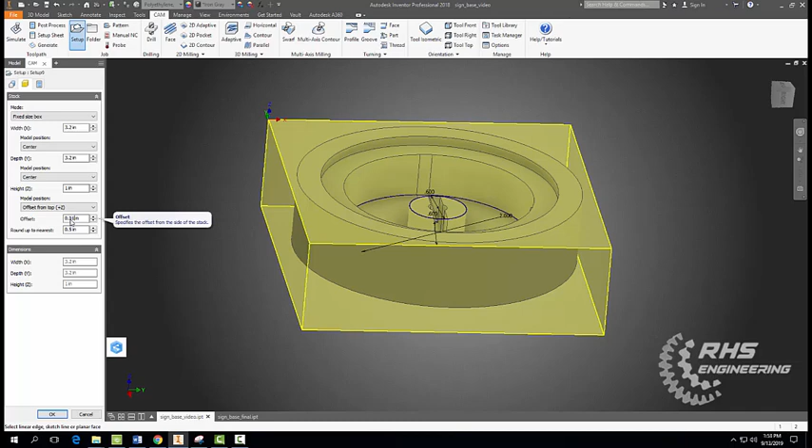Okay, now let's come on up here to our stock, and we're going to go to a fixed size box, and we want that to be 3.2 inches. Okay, centered by 3.2 inches. And our height is Z, and we're going to offset it from our top by 0.01 inches. Okay, and that should do it. Go ahead and hit OK.

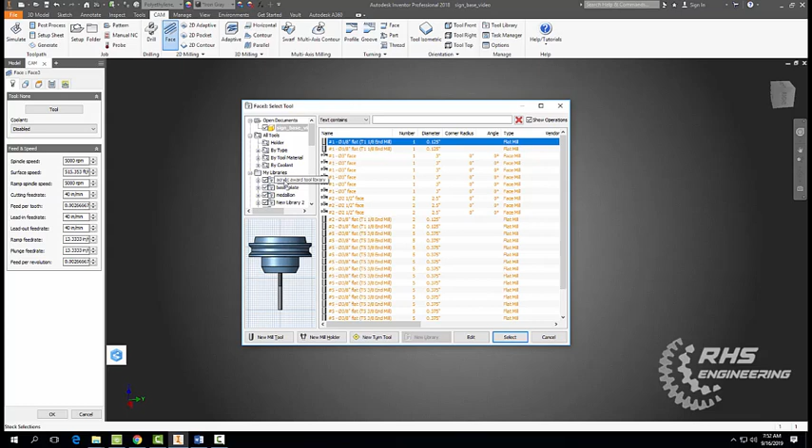With our setup done, we can start our first operation. So most machining operations always begin with a face. So we're going to come on over here and select face. Okay, make sure your coolant is disabled. And for our tool, you should have installed your acrylic award tool library. So click on that, and we're going to select the 3-inch facing mill. Go ahead and hit select.

We're going to go with a spindle speed of 5,000. All right, and a feed rate of 40. All the other default values are fine. For our geometry tab, we're just going to click the circle, okay? And then for our heights tab, the default values are fine here. For passes tab, we're going to use a stock offset and a pass extension. We're going to change these values here.

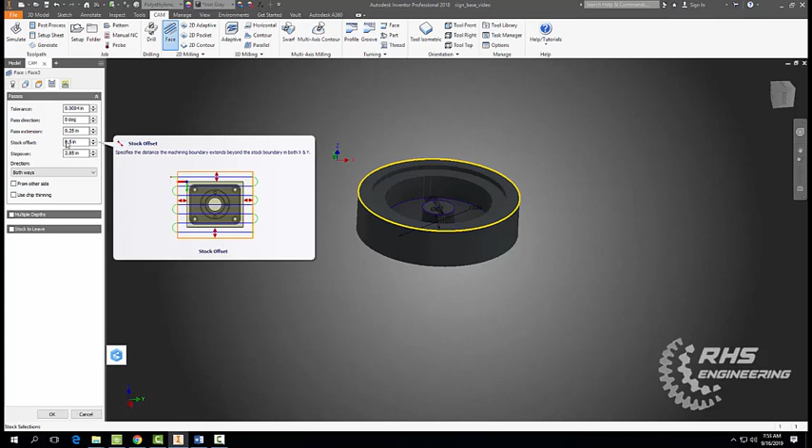So our pass extension is going to be 0.25. Okay, and what that will do is it'll move our tool a little bit out farther past our stock material when it goes to machine it. And we're going to use a stock offset of 0.5 inches. Okay, so that'll make sure our block of stock material is completely faced off. All right, and that should do it. Let's go ahead and hit OK.

By changing our pass extension to 0.25, notice our tool path goes farther past our part here. So it's covering a little bit more area here. All right, so for our next operation, we're going to do a 2D adaptive. So up here at the top, select 2D adaptive.

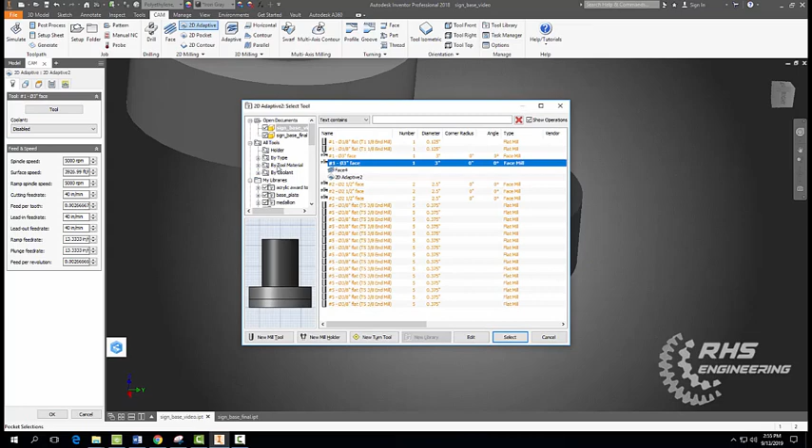Okay, we need to change our tool, but first let's go ahead and disable our coolant. Our tool, using our acrylic award tool library, is going to be a 3/8 flat end mill. And let's go ahead and select that. Our spindle speed, 5,000. Our cutting feed rate is going to be 60. All right. And we're going to do our ramp as 30 and our plunge as 30.

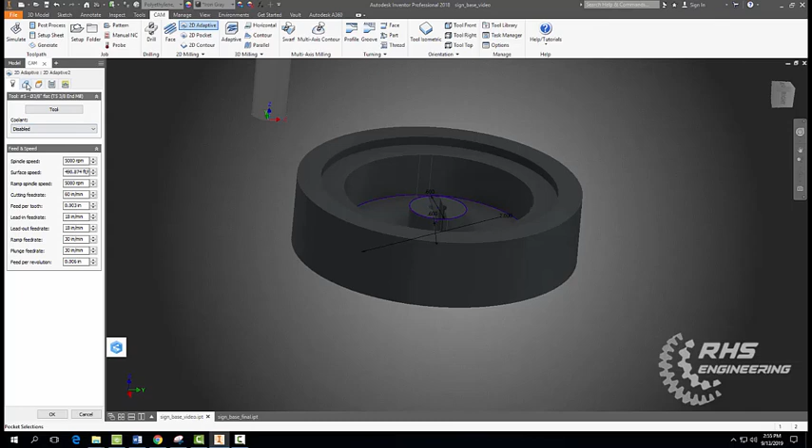Okay, now let's come on over here to our geometry. We're going to just select the outer edge of our part here. For heights, the default values are fine. For passes, we're going to use an optimal load of 0.2, so a little bit bigger step over.

And for stock to leave, we're going to leave a little bit of stock along the walls since this is a roughing strategy. We're going to leave 0.01 along the walls and none for axial. So we're going to basically go completely down to the bottom edge of our part here. We're going to leave no stock along the floor or flat areas.

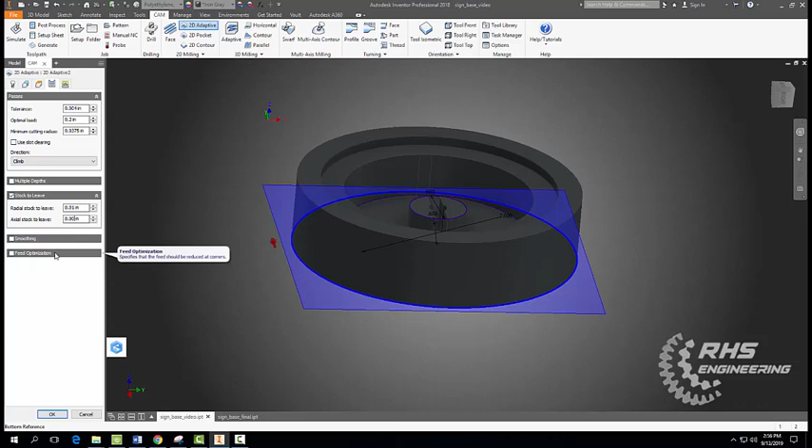Okay, and one thing we're going to do is we're going to check smoothing this time. And what smoothing will do is it'll take basically a bunch of linear tool paths and convert them into circular or arc tool paths. So it'll simplify your G-code. All right, let's go ahead and hit OK. And we have basically our tool path removing the material around our circular part here.

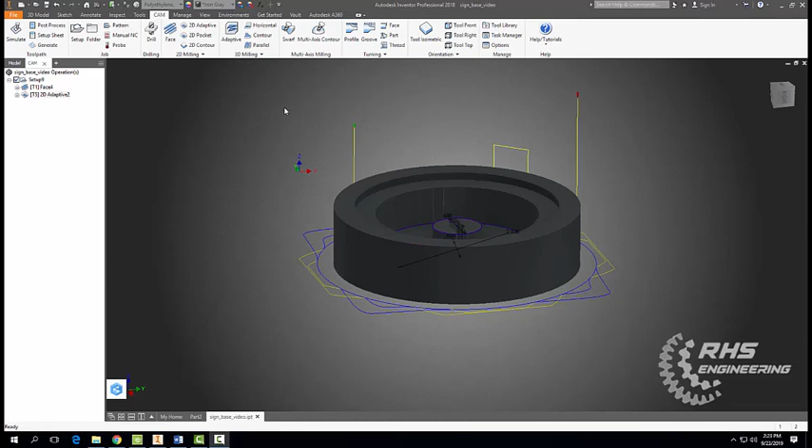Now that the material around our part is removed, we want to go ahead now and do an operation that's going to remove the material inside of our part. So we're going to start with a pocket here, but we're going to do what's called a 3D pocket. So up here at the top, go ahead and select 3D pocket.

All right, we're going to use the same tool as last time, our 3/8 end mill. Make sure your coolant is disabled. In case I forgot to mention that, it should be disabled throughout the entire setup here. So coolant should be disabled in every operation. Our spindle speed, we want 5,000. Okay, our feed rate, 60. And our ramp feed rate, we want 30, and our plunge feed rate of 30.

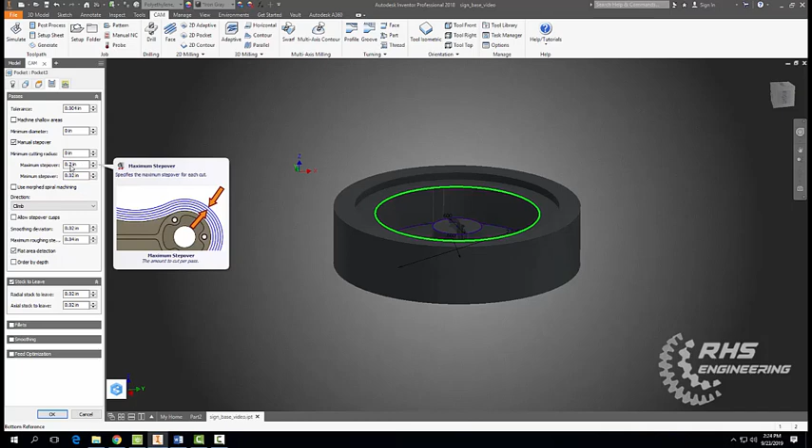All right, and up here at our geometry tab, we're going to select this inner circle right here, and that should do it. For our heights tab, all of our default values are fine. Okay, for our passes tab, now we got to make some changes here. So we're going to do a manual step over of 0.2. All right, and we're going to do, let's see here.

Maximum roughing step down of 0.4, okay, not 0.04. So every step we go lower and lower into our part, it's going to be 0.4 inches. Now for stock to leave, we're going to leave 0.01 along the walls, and we're going to leave 0 along the flat portions of our part here. So no stock on the bottom. And we're going to check smoothing.

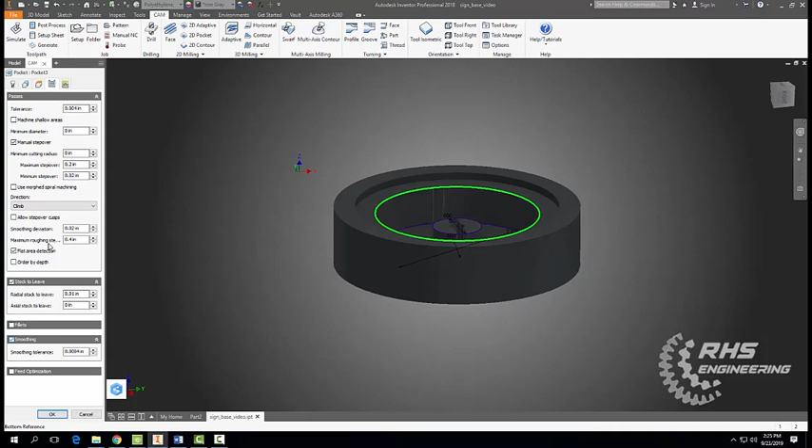And then over here in linking, the only thing we're going to do is go with a more aggressive ramping angle at 5 degrees. So make sure it says helix, and we're going with 5 degrees. Everything else should be okay. Let's hit okay. And that should do it.

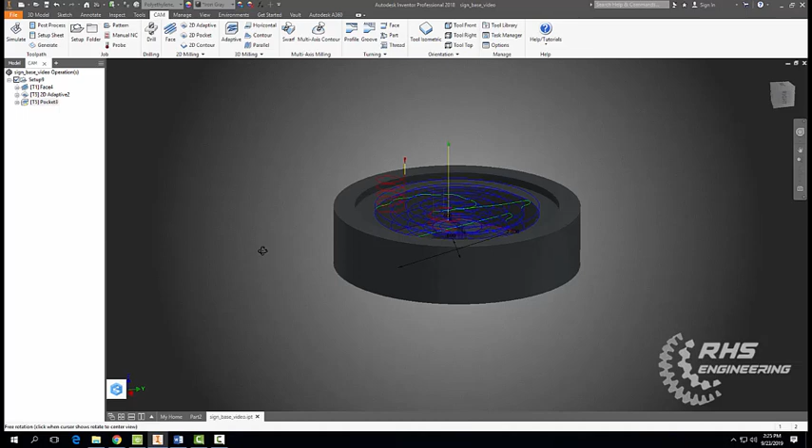So you're probably thinking, but Mr. Fuller, what about this area over here? Well, remember this blue line represents the center of our tool. So our tool is going to sweep around here. It's going to leave some stock, but that's okay. When we do our finishing pass, we will clean up this wall later. All right, so that about does it for our roughing operations. Now we need to start our finishing passes here.

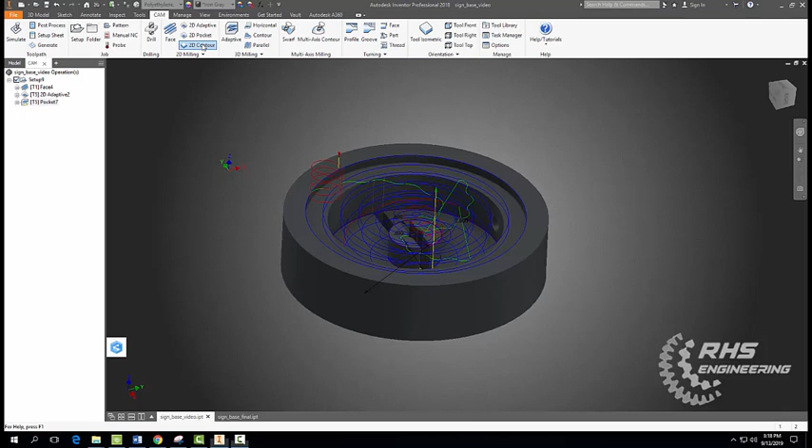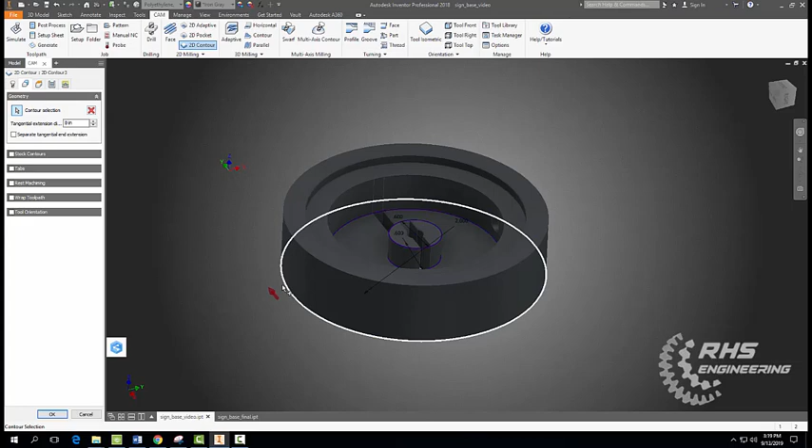So we're going to come up here to 2D contour. Once again, we're going to use a 3/8 flat end mill. Our coolant is disabled, but with finishing passes, we want to slow down our spindle speed. So we're going to go with 3,000 and a feed rate of 20. For our geometry, we're going to select this outer edge here because remember we left some stock behind. But we're going to do something a little bit different here.

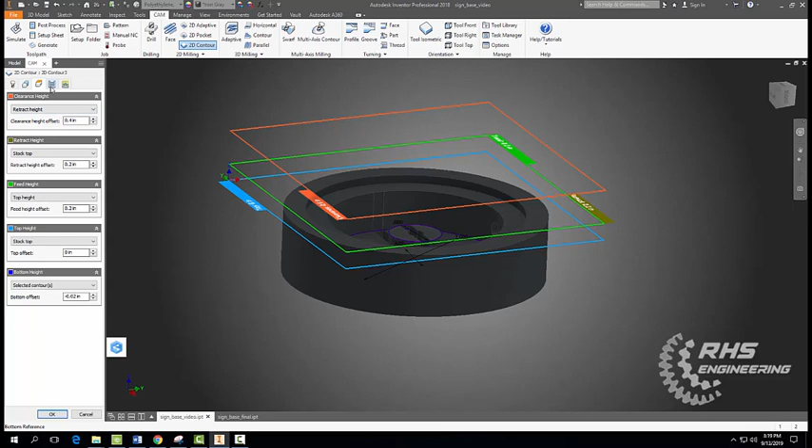For our bottom height, we're going to change this to minus 0.02. What that will do is bring our tool down, so when we're cutting around this guy, it'll cut a little bit deeper. So for our next setup, when we go to face this other side, it'll make sure that we have no material left behind. So make sure you set the bottom height to minus 0.02. Make sure your finish feed rate says 20. We'll check stock to leave and we'll hit OK.

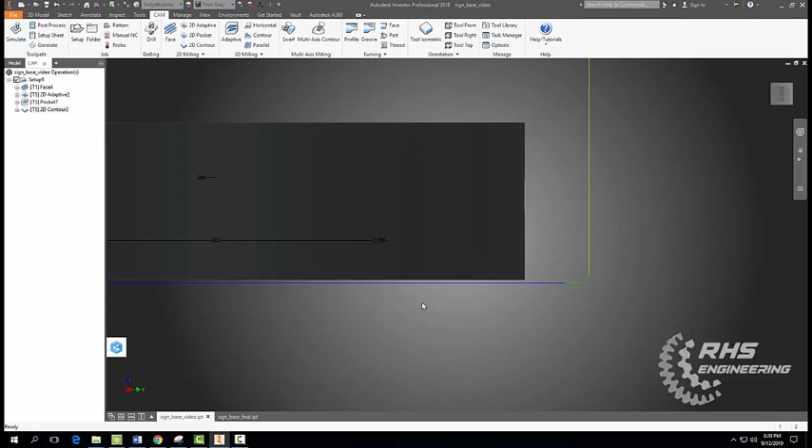And if you look, you can see our tool is going to cut a little bit deeper than the actual part. Like I said, that's to ensure when we go to face this side off on our second setup, all that material is getting removed. Okay, so let's go ahead and do another 2D contour. Same tools and feed rates. 3/8 tool, coolant is disabled, 3,000 and 20 for our feed rate.

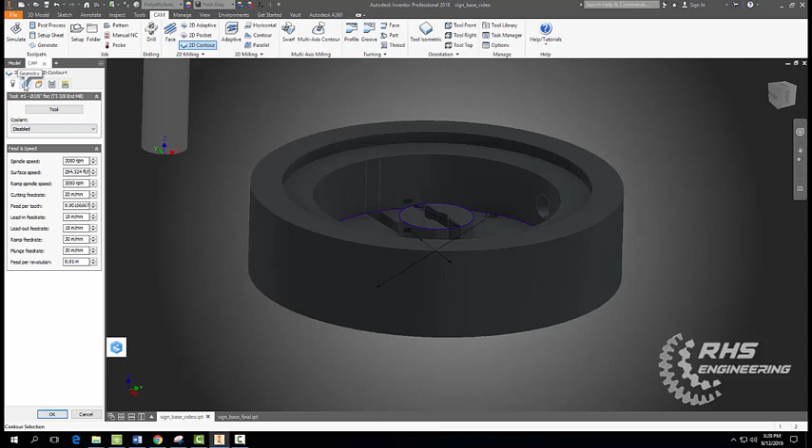So everything's the same. For our geometry now, we've got to remove the material along our vertical walls. So we're going to click there, and there, and there. Now this is important. You'll notice this arrow's inside here. You've got to click on the arrow because if you don't, your tool's going to plow through this plastic portion right here. By clicking on that arrow, now it's going to go around it.

For our heights tab, everything looks good. For our passes tab, everything looks good. Make sure your finish feed rate says 20. We will check smoothing, and we'll go ahead and hit OK.

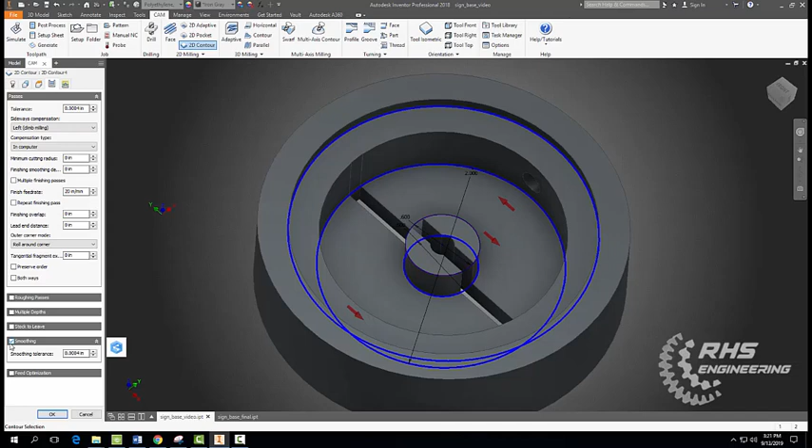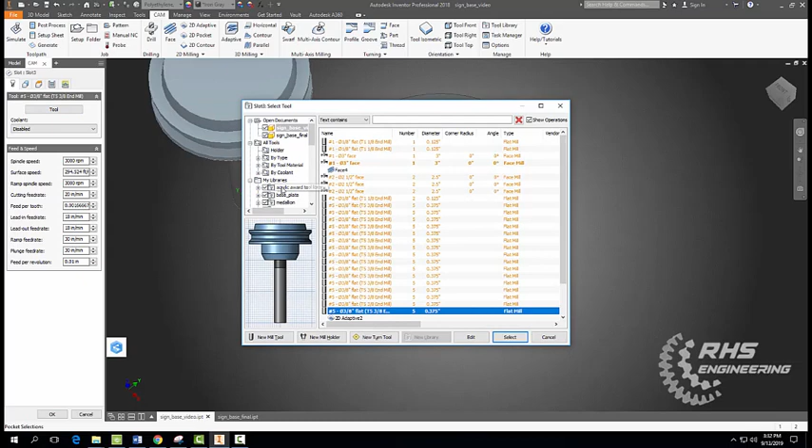With most of our material removed, now we can start machining out this slot for our sign to be placed into. So we're going to come up here to 2D milling, select slot. We're going to change our tool; now we're going to use a 1/8 flat end mill, so a little smaller tool. Coolant is disabled. We're going to go with a spindle speed of 5,000, a cutting feed rate of 30, a ramp feed rate of 30 and a plunge feed rate of 30.

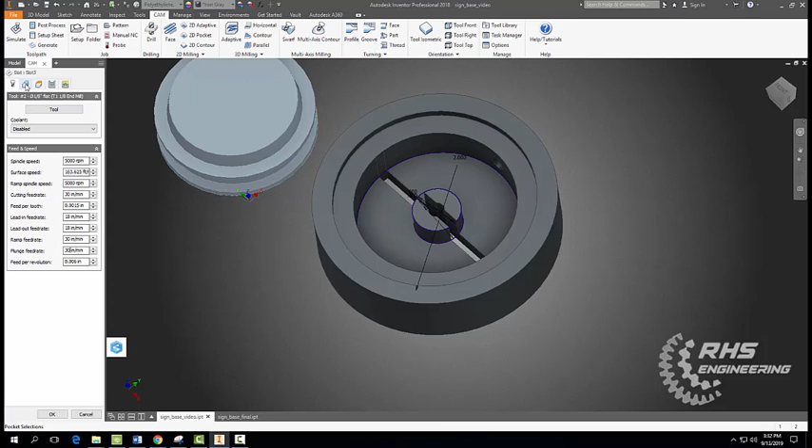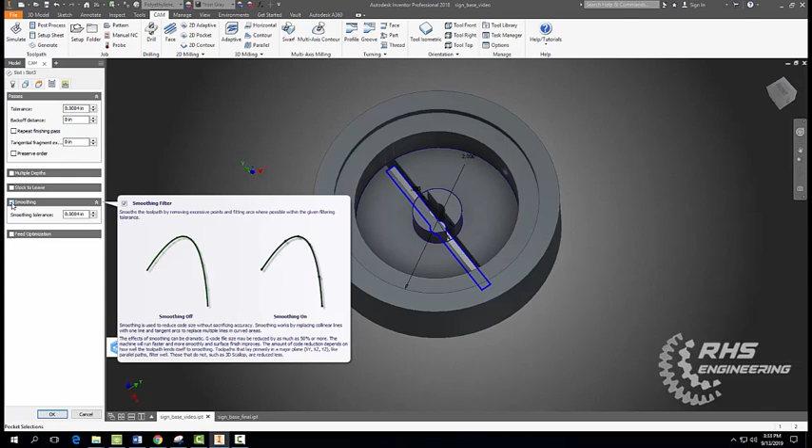Now for our geometry, we've got to select basically the bottom of the slot. And then for our heights tab, once again, we're going to send our tool a little bit deeper than the part, so minus 0.02 inches, not much, but just a little bit. For our passes tab, we're going to check smoothing. And for our linking tab, we're going to use a 3-degree ramping angle. Let's go ahead and hit OK.

And here is our slot. If you look at the toolpath here, you'll notice it only did a half circle, so we've got to do one more toolpath, and that brings us to a 2D milling operation called a bore.

We're going to use the same tool, spindle speed of 5,000. However, since most of the material's already removed, we'll give it a slightly faster feed rate of 40. Change all ramp and plunge feed rates to 40 here too, since we're going down pretty quickly.

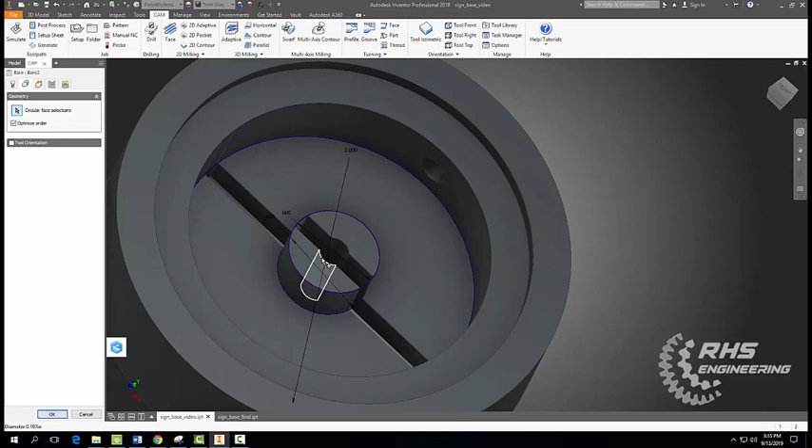For the geometry, we just need to select one of these faces. Notice it created this little boring toolpath down the middle. For our heights, same thing, we're going to go minus 0.02, so we'll bore down just a little past the bottom of our part.

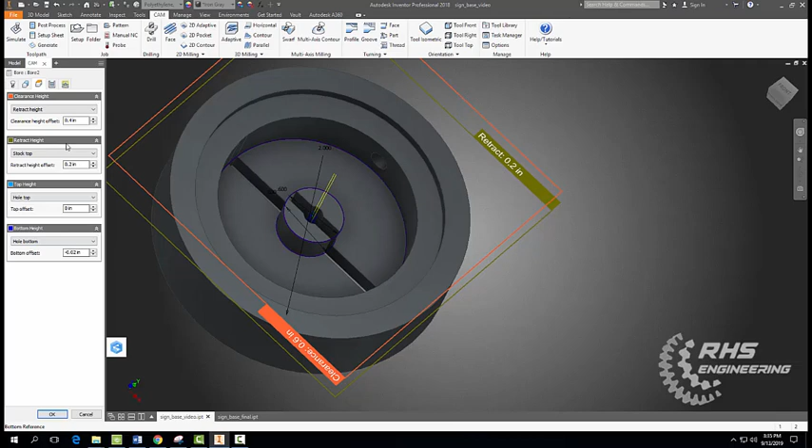Everything else looks good. Let's go ahead and hit OK.

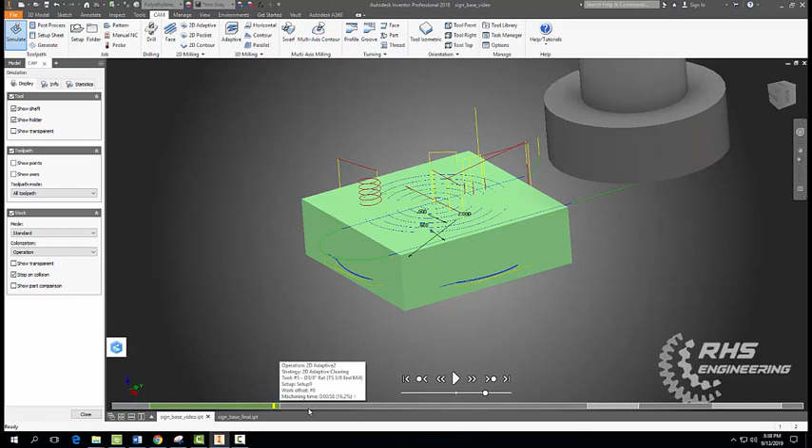Now let's go ahead and simulate it. Click on Setup, Simulate. First thing you want to check is that you hopefully have a total machining time of around 6 minutes. Check on stock, and also check on stop on collision. Hopefully you have no red lines down here, and if you do, let me know. Let's go ahead and play it.

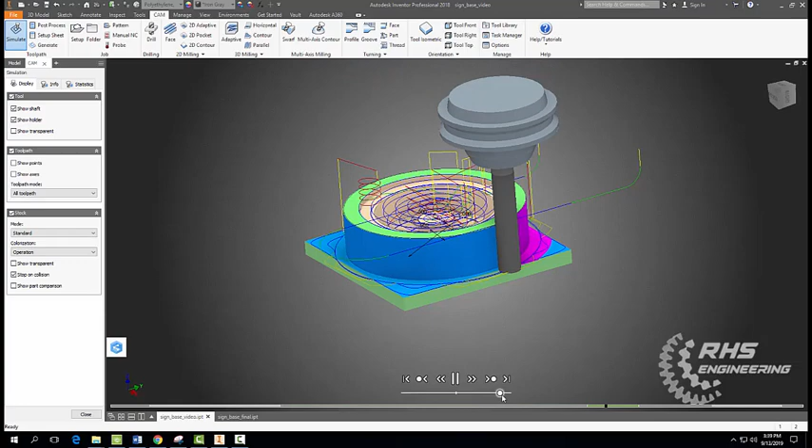We're going to do our facing, then come around and do our 2D adaptive, then start our 2D pocket, then our 2D contour finishing pass, then our slot, then our bore, and we're done. Looks good.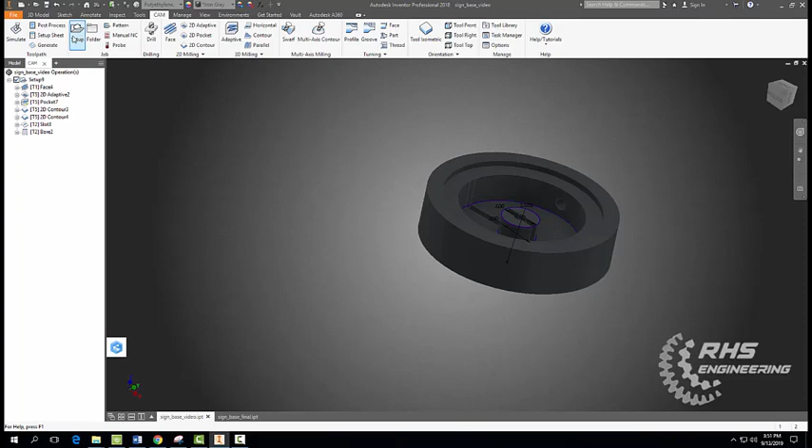Our first setup's done. Let's go ahead and start our second setup to remove the remaining material on top of our part. So we're going to start another setup, but we need to flip our part over, and we're just going to select this back corner.

Notice our X and Y aren't correct, so we're going to come over here to, let's see, let's go ahead and do a Y and Z.

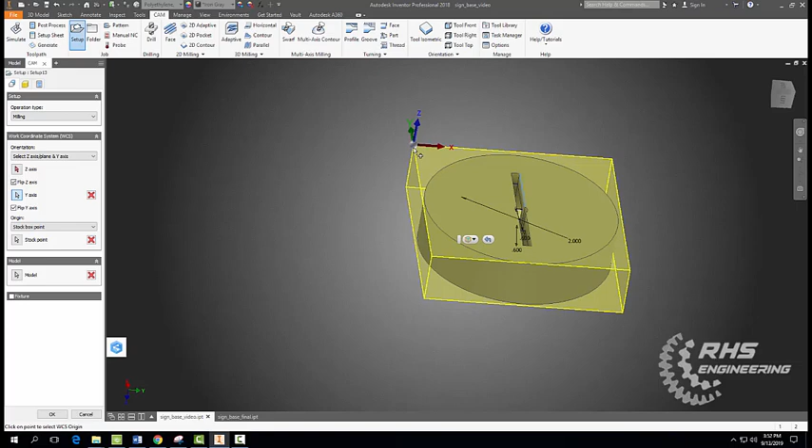I'm going to select my Y here as that, and then flip my Y, and then flip my Z. And I'm good. My positive X is going to my right, my positive Y is going away from me, and positive Z is pointing up. So that's what we want.

Now for our stock, we're going to do the same thing as before, but something slightly different. We're going with 3.2 again, centered, and 3.2 for our Y, centered. But remember, we removed a little bit of material, 0.01 inches with our facing operation, so our thickness is not quite an inch, it's 0.99 inches.

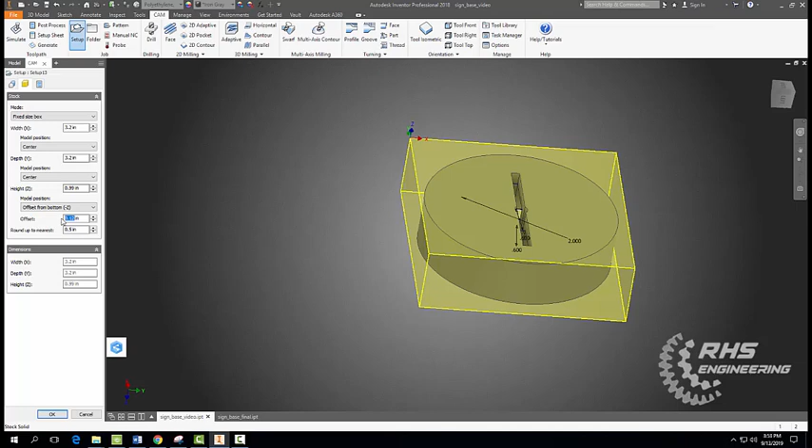For model position, offset from Z, we're just going to go 0. That puts it perfectly at the bottom here. Let's go ahead and hit OK.

The only thing left to do is remove the rest of the material on top of our part, and we can do that with a facing operation. Let's go up and select face. We're going to change our tool, come to our acrylic award tool library, select our 3-inch face, hit select, make sure our coolant is disabled. A spindle speed of 5,000 is what we want, and a cutting feed rate of 40 sounds good.

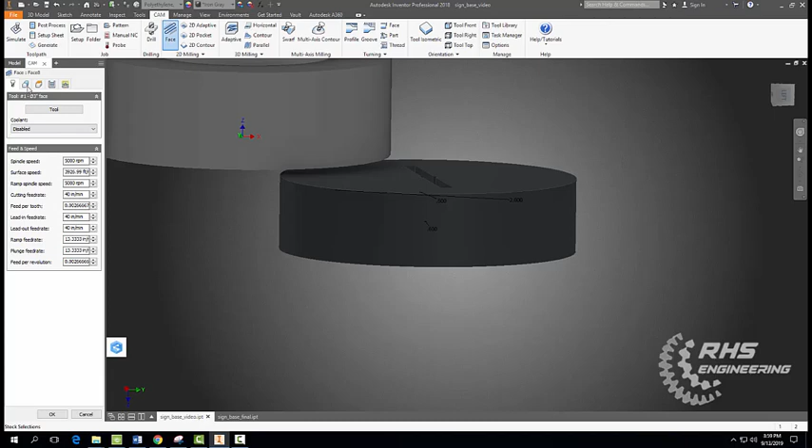For our geometry, we're just going to select the bottom now of our part, and we're going to go to our heights tab. Our values are good here.

For our passes, we're going to use a pass extension again of 0.25 and a stock offset of 0.5, half an inch. And for multiple depths, we want to do this in 3 passes or 3 layers, so we're going to change that to 0.1.

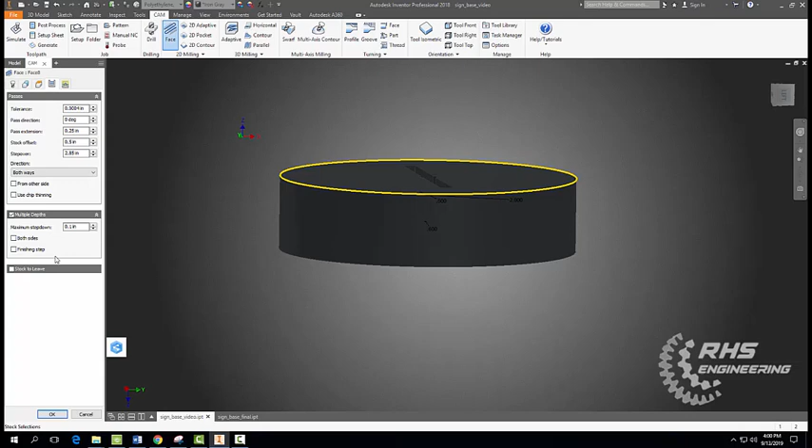Let's go ahead and hit OK. Okay, that looks pretty good.

Let's go ahead and simulate it now. Click on your setup, simulate, make sure your stock is checked and stop on collision. Let's go ahead and run it.

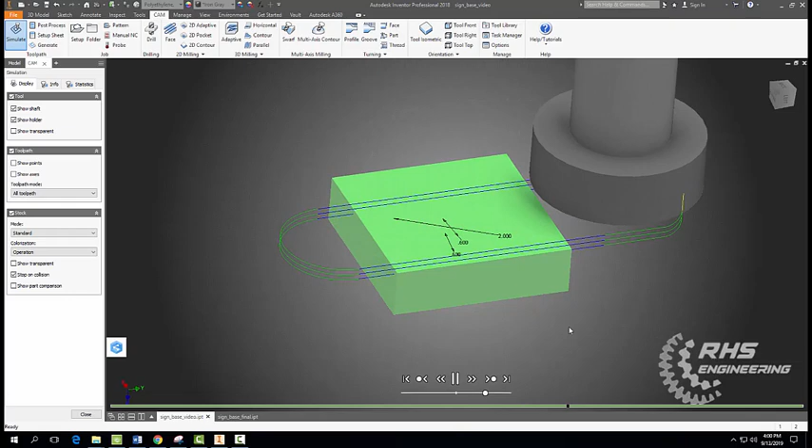And it looks good, we got it in 3 passes. Our third pass should hopefully show the surface of our part, which it does. All right, and that should do it for this particular part.

When you've checked everything out, checked for collisions, and your simulation looks good, double, triple check it, hit okay, and get ready to post-process your code here.

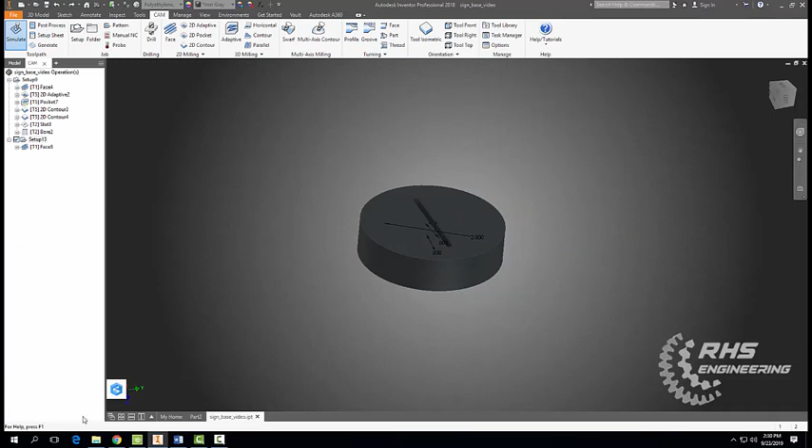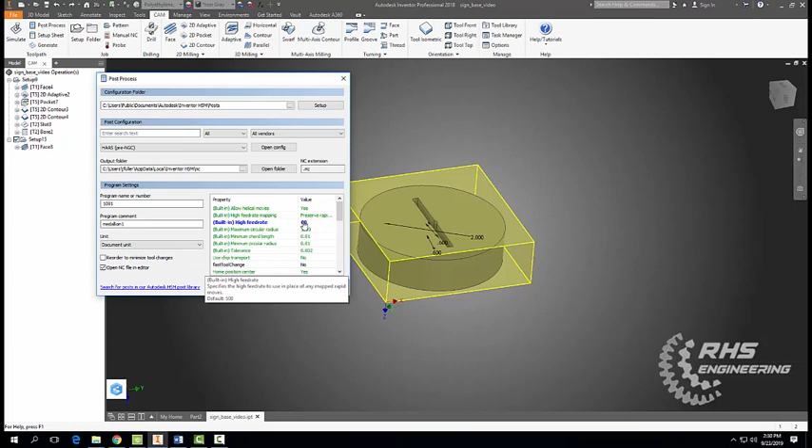So you come up to your setup, right-click, post-process. For this particular project, we're going to be using exclusively the Haas, so make sure you select the Haas pre-NGC. For built-in high feed rate, make sure you select 60 here if it's not already done. Everything else looks good. Go ahead and post it and save it to a thumb drive, and you're ready to roll.